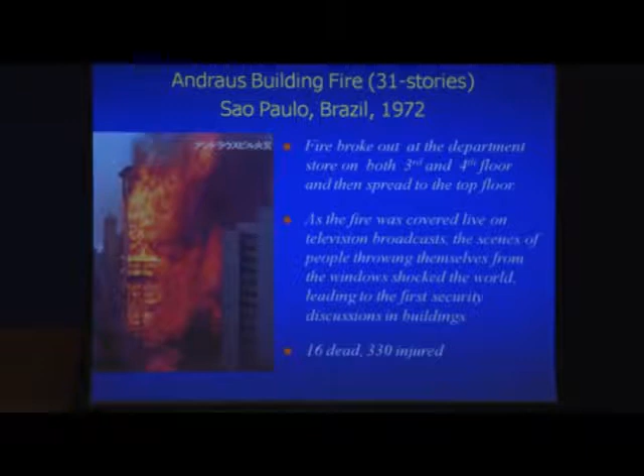I don't need to explain much about this fire because you are Brazilian, you know much more than I know. But it was a very shocking fire to us, and as the fire was covered live on television broadcast, the scenes of people throwing themselves from the windows shocked the world, which led to the first security discussions in buildings.

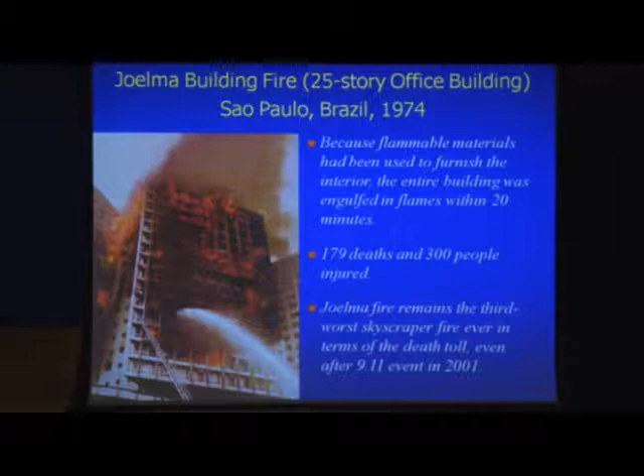Then next year, as you know, the Joelma building fire. It was a much more severe fire, resulting in 179 deaths and 300 people injured. Because flammable materials had been used to furnish the interior, the entire building was engulfed in flames within 20 minutes. The Joelma fire remained the third worst skyscraper fire ever in terms of the death toll, even after the 9/11 event in 2001.

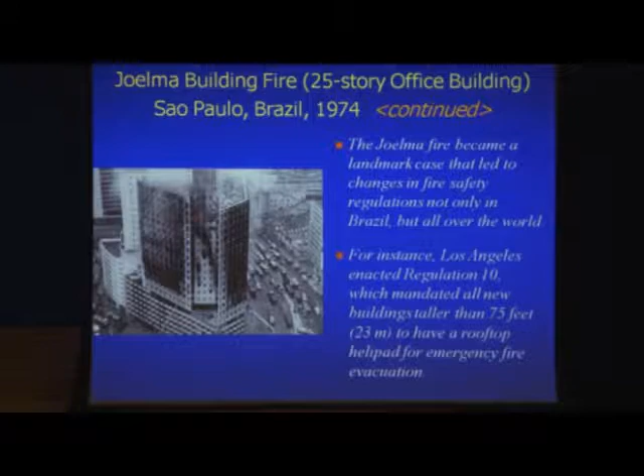The Joelma fire became a landmark case that led to changes in fire safety regulation, not only in Brazil, but all over the world. For instance, Los Angeles enacted Regulation 10, which mandated all new buildings taller than 75 feet to have a rooftop helipad for emergency fire evacuation.

At the same time in Japan, when I was a student in the master course in the university doing fire safety, there was a fire. Also a very deadly fire. 118 people died in the fire in only the 7-story Sennichi department store building. The fire broke out at 22:27 at night in the women's dress sales floor on the 3rd floor under renovation work, due to unspecified cause. And the smoke very quickly spread to the entire building through the vertical shafts of stairs and the elevators. Even though it was night, on the 7th floor there was a nightclub in operation where most of the victims were found. 118 died.

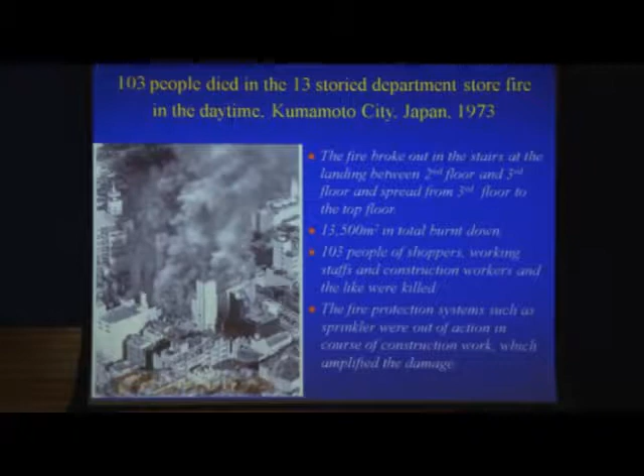In the 1980s, there was another high-rise fire in the U.S., called the First Interstate Bank Building Fire, in 1988 in Los Angeles. As a member of the Japanese government investigation team, I went to the site and entered the building to look at the damage. And we made a report about how the fire spread and how people escaped. Unfortunately, it's written in Japanese.

This fire gave us very good lessons for fire safety in tall buildings. First, I want to show you the video which was made by the Los Angeles City Fire Department.

Sir, I don't know the address. I'm just down the street from it, I'm calling from another building. You're calling from 600 Wilshire? Yes, do you know the intersection or address? It's on Hope and Wilshire Boulevard. Okay, so we're on our way. Good, it's up on the top floor.

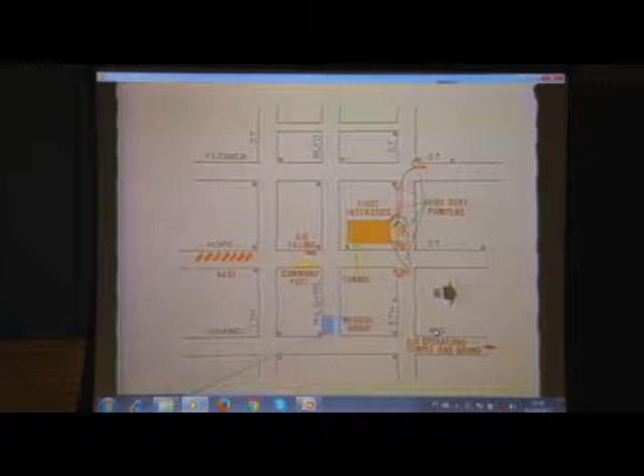On Wilshire was our medical group, set up to treat patients, firefighters and civilians injured in this fire. Moving up towards the fire building, directly north was the fire department inlets used to augment the water system of the building.

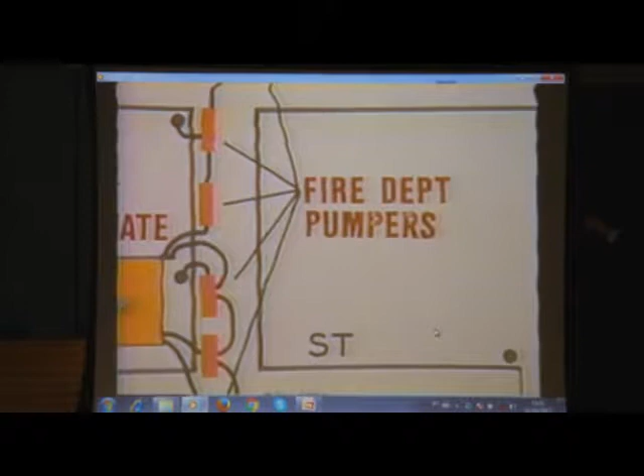We supplied water here through 4 pumps. A number of the hose lines from the pumps were cut by falling glass out of the building and had to be replaced several times during firefighting, as the debris and falling glass damaged several hoses.

Entering from the ground floor was very dangerous, so they decided to enter the building through the tunnel.

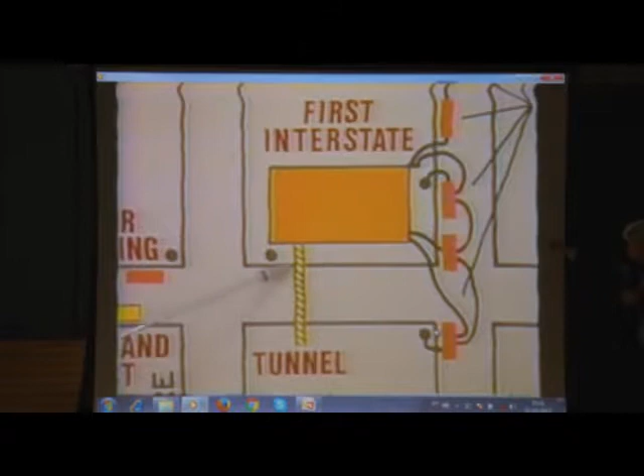The inside is entirely burned down from the 12th floor to the 15th floor. The 16th floor is heavily damaged, and the 17th floor is just a little damaged.

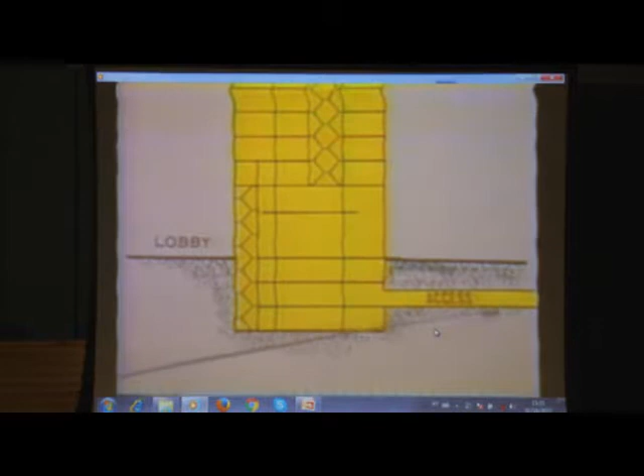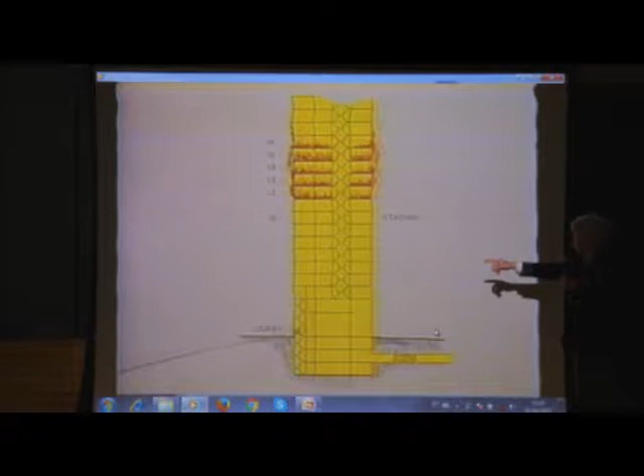Now you can see the hose, water discharge by hose. They entered through the tunnel in the building, and took the stairs, not elevators, up to not the fire floor - they climbed 1 and 2 floors up from the fire floors, so that's the 16th floor and the 17th floor.

Firefighters were deployed on the edge of the building, at the window edge, with a hose. The flame is not from inside, the flame is from outside through the window. They waited for the flame to come and discharged water from the room. That was really successful.

On the 17th floor there was almost no damage. The 16th floor had half damage. The strategy they took was hose lines arranged along the window edge.

Okay, I finished the movie.

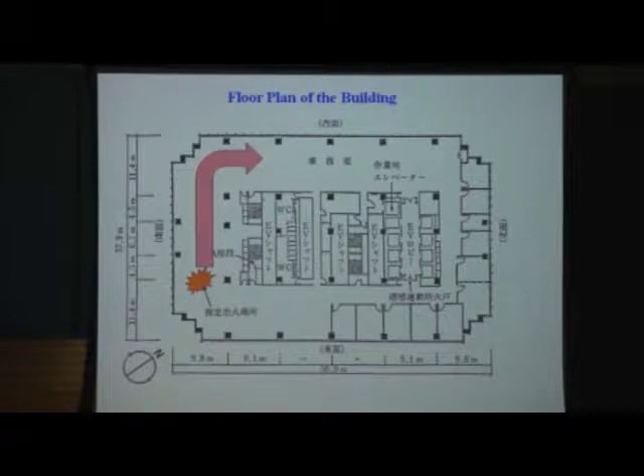On the fire floor, the 12th floor, fire started by some malfunction of a PC, and it is thought the fire cause is from the PC, and this spread out through the floor.

However, the important thing is fire zoning - compartmentation in the center core is very protective. 2 hours fire rating protects the center core, so there was almost no damage inside the center core. That's the most important thing for a high-rise building.

The firefighters don't use, of course there is naturally a firefighters lift, but at that time, before 2008 in the US building code, even though there is a fire lift - I think in Brazil also you have a fire lift - it's not safe from fire. Fire and smoke are the same issue. They can manipulate the fire elevator car from inside, but the only thing they can do is that kind of self-control operation, but it's not safe.

So the firefighters use the stairs inside, very safe stairs, to access 1 or 2 floors above the fire floor. So then they can reach the 16th and 17th floors and wait for the fire to come. That is the main reason they stopped the fire spread.

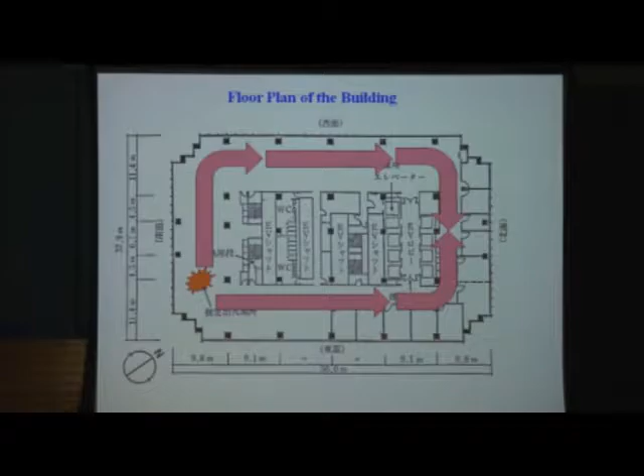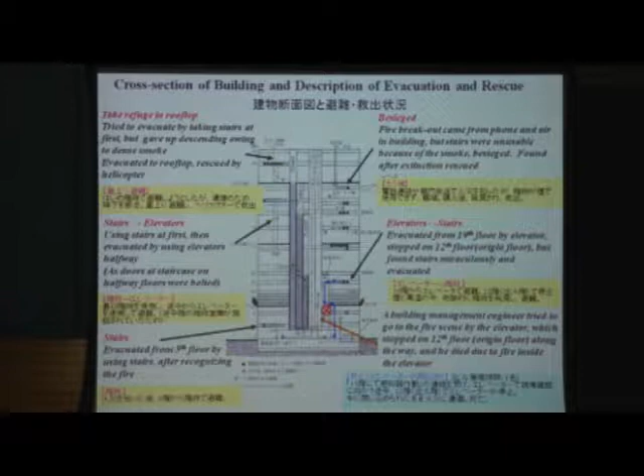I won't go into detail about this. This is the route of evacuation, but it's too much in detail, okay, so I'll skip this slide. If we have time in the discussion, we can explain.

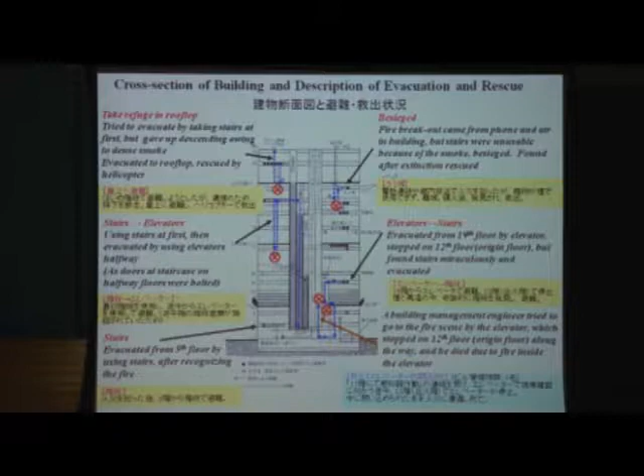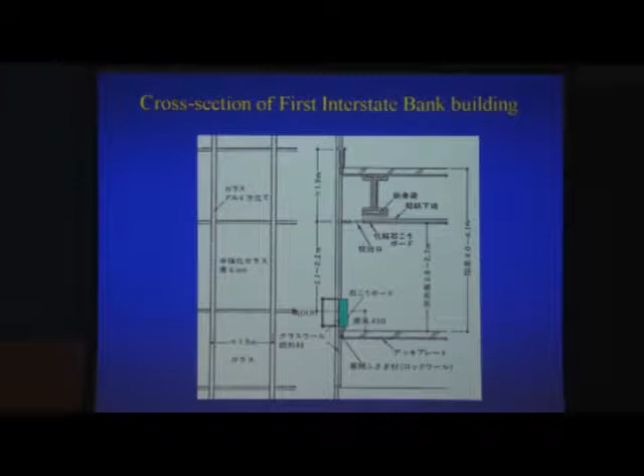One of the reasons for fire spreading from the ejected flame in the exterior wall is that they have a very small size spandrel between the floors, so then the flame easily goes up and ignites the upper floors. This really happened in the First Interstate Bank building.

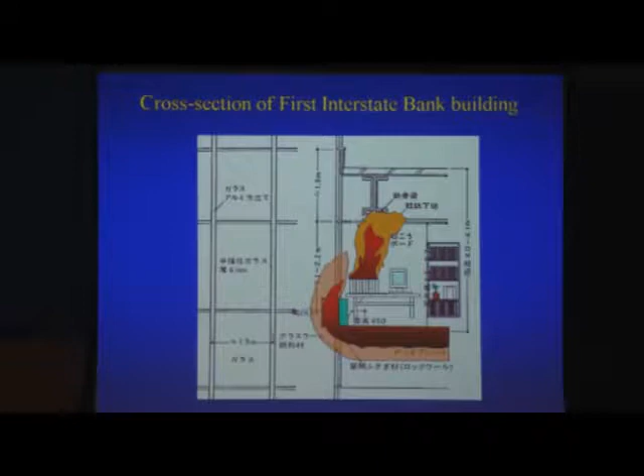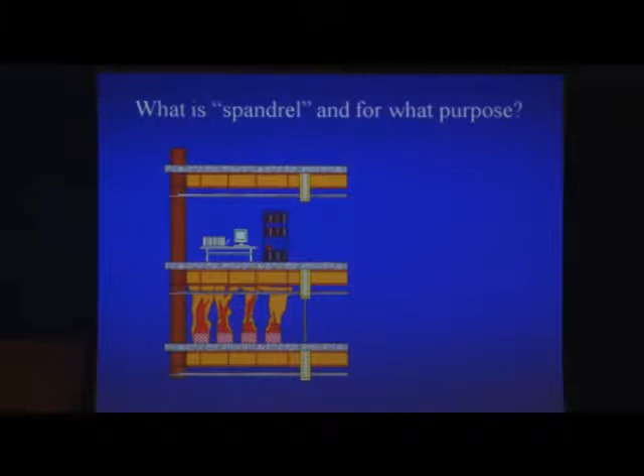What is a spandrel and for what purpose? The left picture shows - I think many high-rise buildings in Brazil have a similar configuration. Some buildings may have a spandrel, but many buildings have no spandrel, only glass between floors. So what happens in that kind of building?

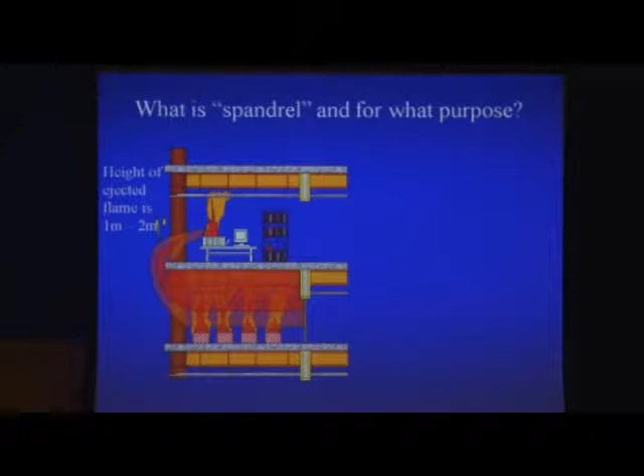Then easily the glass is broken and the ejected flame goes to the inside. But if you have a spandrel like this, fire is blocked from entering the inside. This is the purpose of a spandrel.

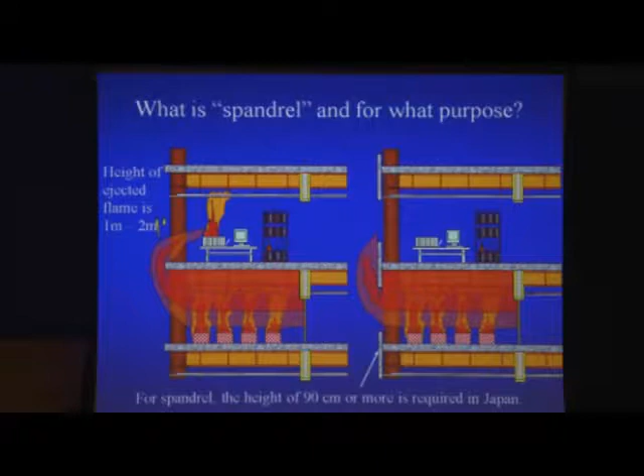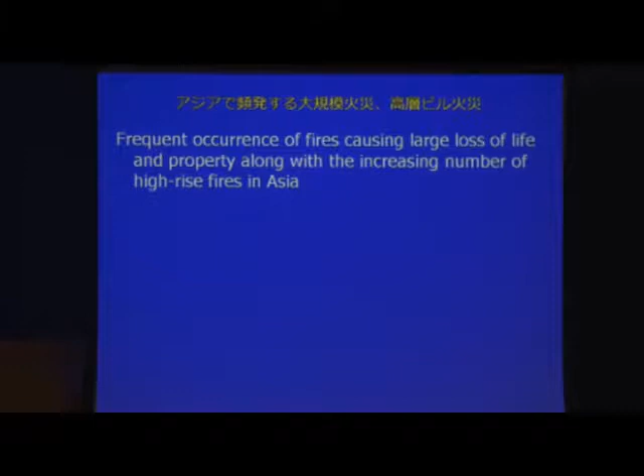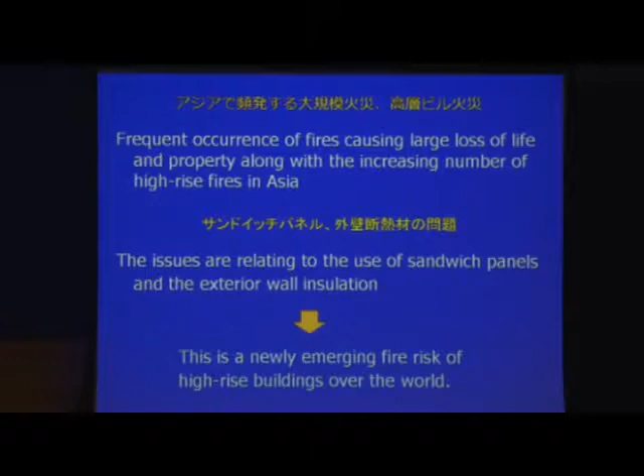Now there is another issue emerging, especially in East Asia and the Middle East - the frequent occurrence of fires causing large loss of life and property, along with the increasing number of high-rise fires in Asia. These issues relate to the use of sandwich panels and exterior wall insulation. This is a newly emerging fire risk of high-rise buildings all over the world now, including the Grenfell apartment fire in London, UK.

In China, 2009, after the Beijing Olympic games, they had a very serious high-rise fire in the China TVCC building. But this news was not released much to the world because the Chinese government wanted to confine this news. But only a Japanese TV station made a news report, so I'll show that one.

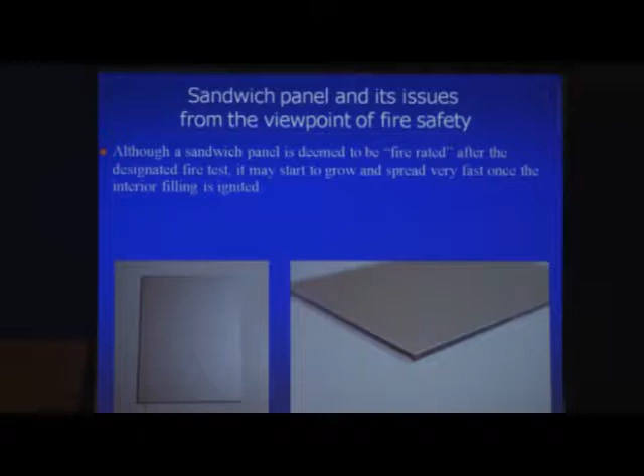So Grenfell Tower—this fire will be discussed by Professor Brian Meacham. So I'll skip this explanation and move to the second part.

My second topic relates to the study of use of elevators in fire evacuation in high-rise buildings. Again, this one.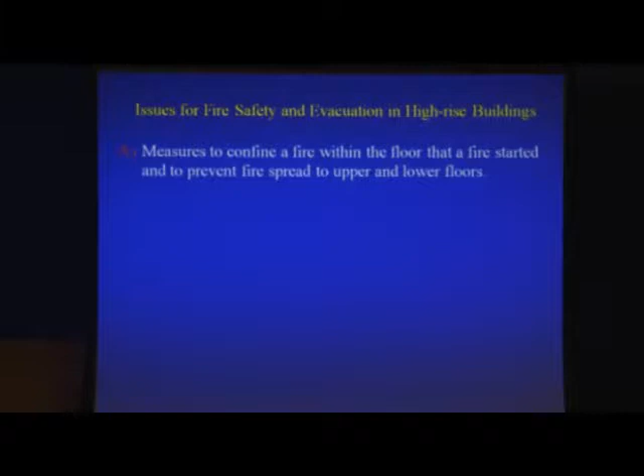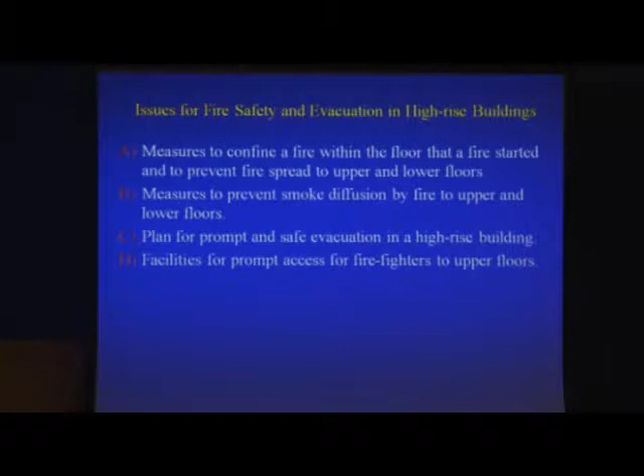First, I'd like to describe the issues of fire protection strategy. A: measures to confine a fire within the floor where it started and prevent fire spread to upper and lower floors. Second: measures to prevent smoke diffusion by fire to upper and lower floors. Third: plan for prompt and safe evacuation in a high-rise building. Fourth: facilities for prompt access for firefighters to upper floors.

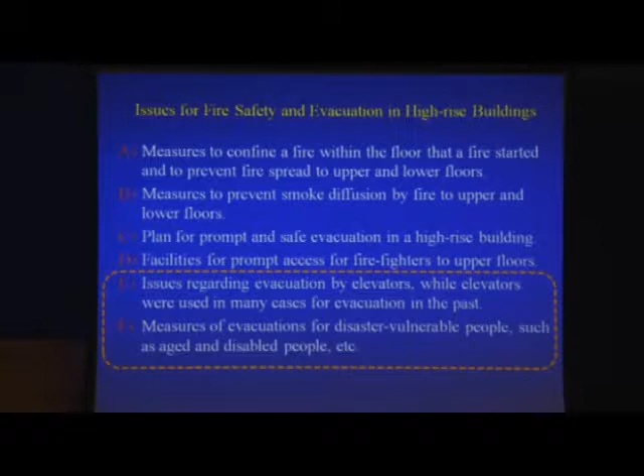Fifth, issues regarding evacuation by elevators—elevators were used in many cases for evacuation in the past. Sixth, measures of evacuation for disaster-vulnerable people such as aged and disabled people. I will talk about the issues of the last two items.

In many past fires in high-rise buildings, not a few people used elevators for evacuation. The population of aged people has been rapidly increasing, and accessibility for disabled people has improved. So many disabled people and wheelchair users are now on upper floors, especially in public buildings like cinema buildings.

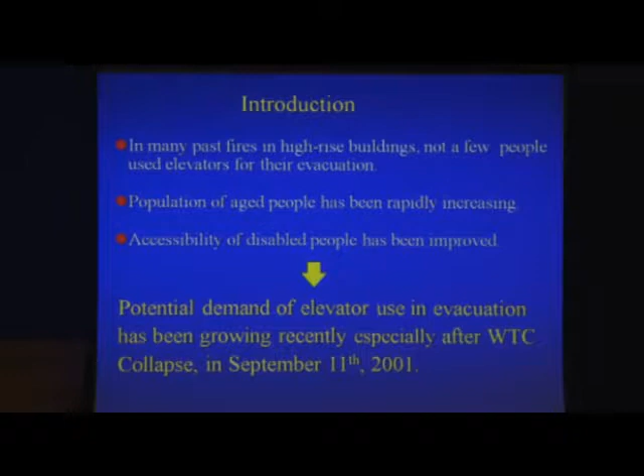Potential demand for elevator use in evacuation has been growing recently, especially after the World Trade Center collapse on September 11th.

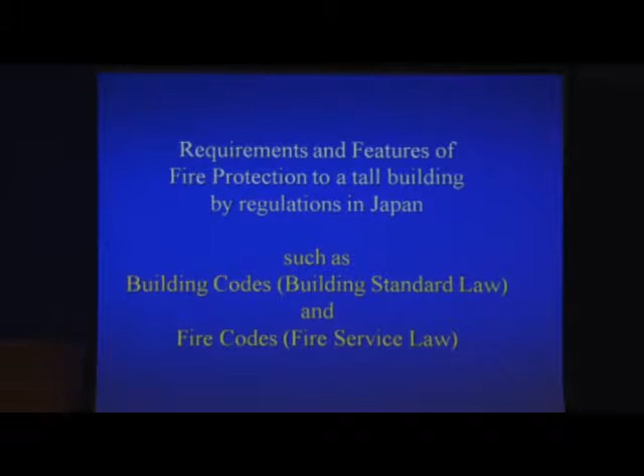Requirements and features of fire protection to a tall building by regulation in Japan, such as building codes and fire codes. Requirements and features of special egress stairs in Japan: all stairs connecting to the 15th floor and higher are required to be special egress stairs.

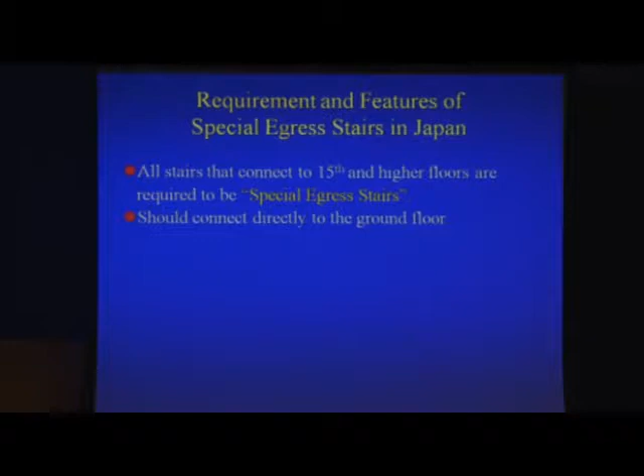It should connect directly to the ground floor, be compartmentalized with fire-rated walls, and be attached with a vestibule with smoke control system in front of the entrance door of the stairs. Mainly used for evacuation of occupants, but after evacuation is completed, it may be used by fire brigades.

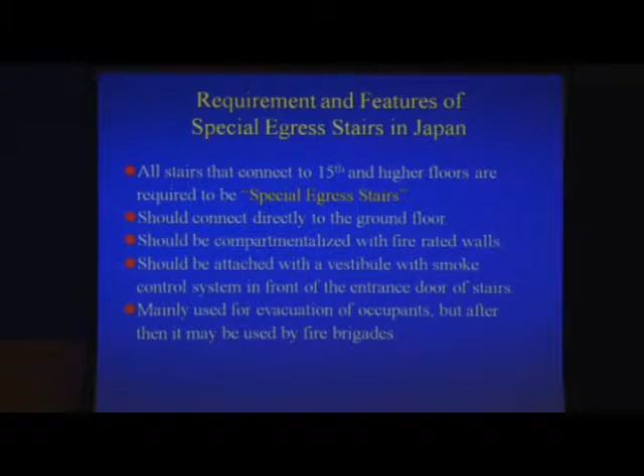Supported by emergency generators, Japanese firefighters can use elevators in high-rise buildings even from the 1970s. But in the US, they changed the building code so high-rise buildings should have a real fire lift in the building—the IBC building code from 2008.

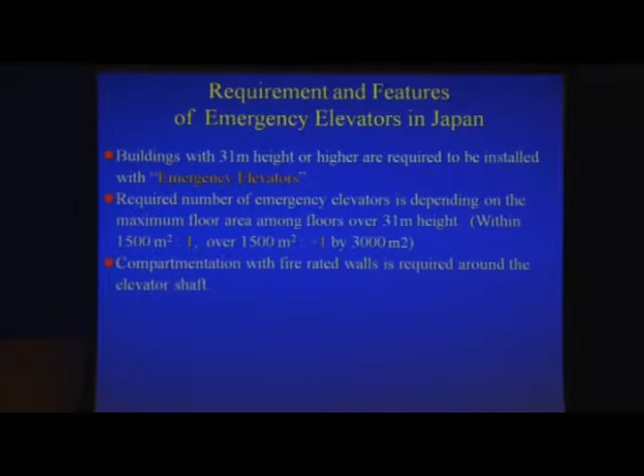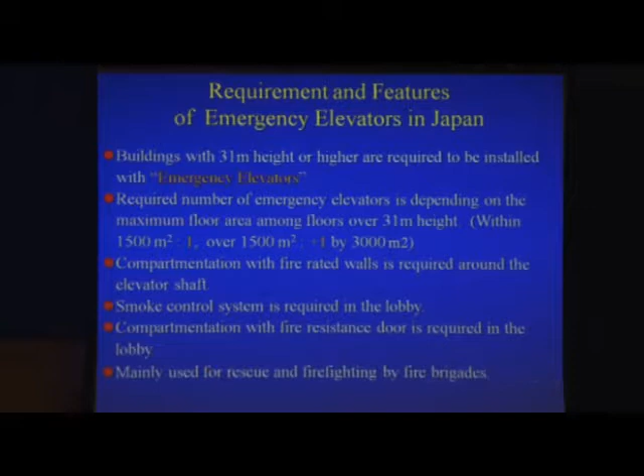Compartmentation with fire-rated wall is required along the elevator shaft. Smoke control system is required in the lobby. Compartmentation with fire-resistant door is required in the lobby, and it is mainly used for rescue and firefighting by fire brigades. But now the discussion has started for allowing disabled people to use this firefighter's lift before firefighters' action.

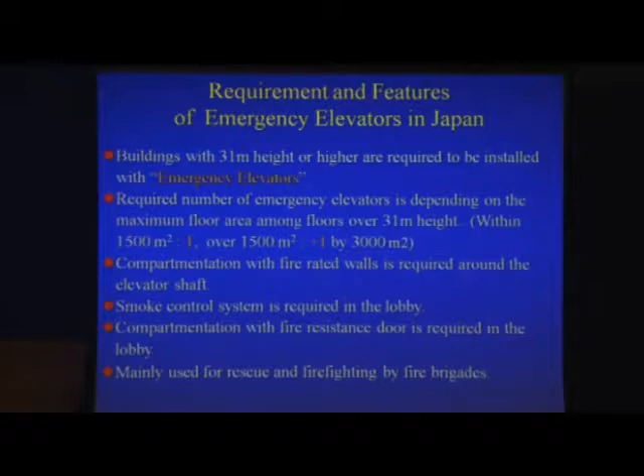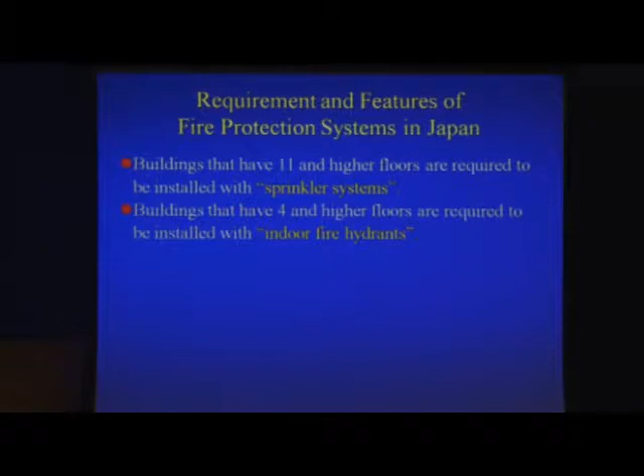And then, requirements and features of fire protection systems in Japan, which are required by the Fire Service Law. Buildings that have 11 and higher floors are required to be installed with a sprinkler system. Buildings that have 4 and higher floors are required to be installed with indoor fire hydrants. Buildings that have 5 and higher floors together with 6,000 square meters in total floor area are required to be installed with standpipe risers.

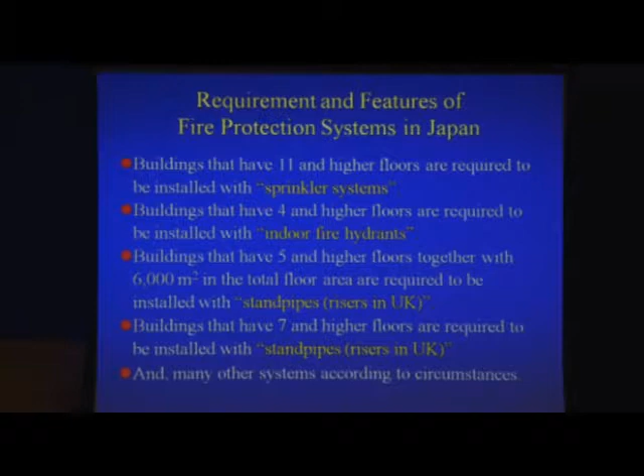Buildings that have 7 and higher floors are required to be installed with, this is the same thing, sorry. Regardless of the size of the building, regardless of the floor area, and many other systems according to the circumstances.

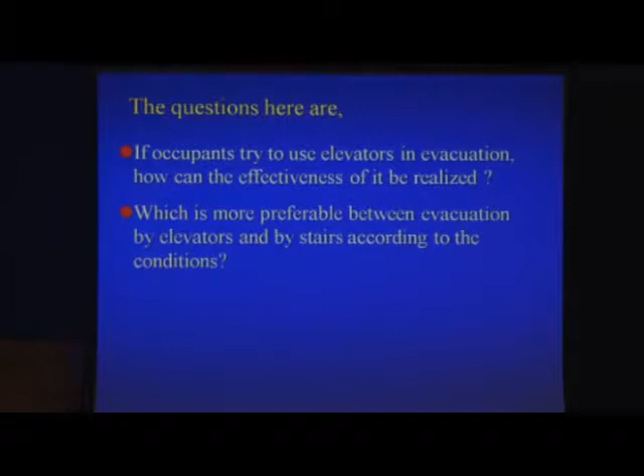Then the questions in this topic are: if occupants try to use elevators in evacuation, how can the effectiveness of it be realized? Which is more preferable between evacuation by elevators and by stairs, according to the condition? We developed a simplified model to evaluate evacuation time by elevators, a feasibility study to examine the issues of elevator use in evacuation.

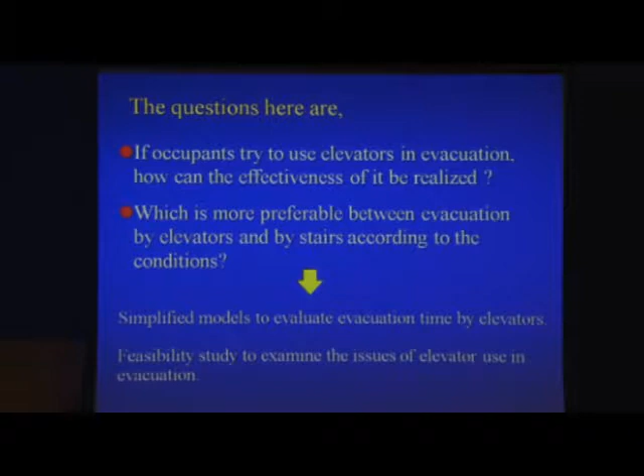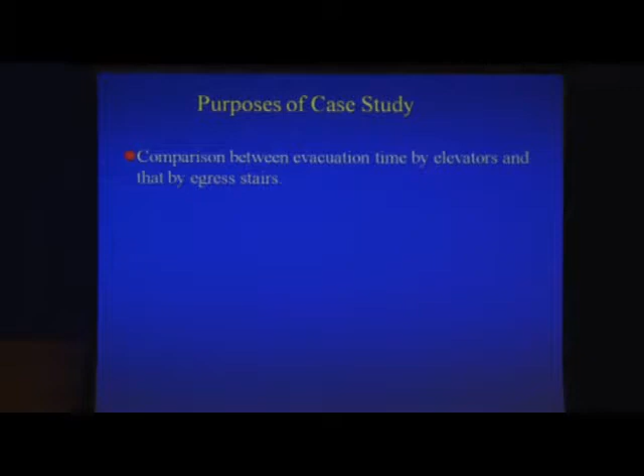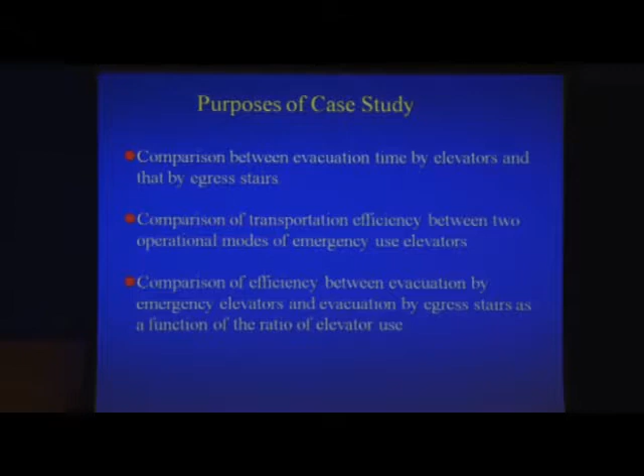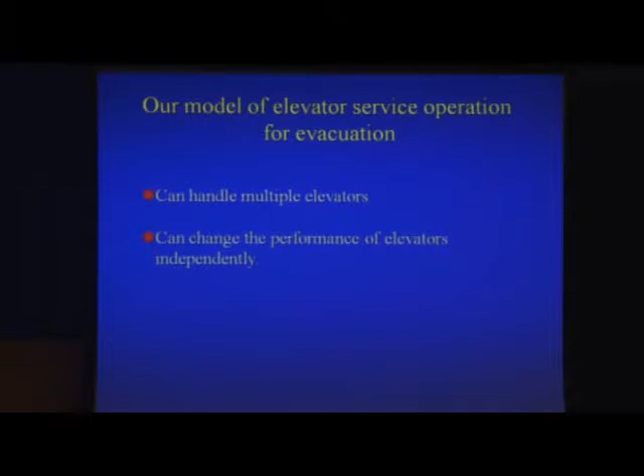The purpose of the case study is the comparison between the evacuation time by elevators and by egress stairs. Comparison of transportation efficiency between two operational modes of emergency use elevators. The third is comparison of efficiency between evacuation by emergency elevators and evacuation by egress stairs as a function of the ratio of elevator use. Our model of elevator service operation for evacuation can handle multiple elevators and can change the performance of elevators independently: speed, capacity, and priority of stop floors.

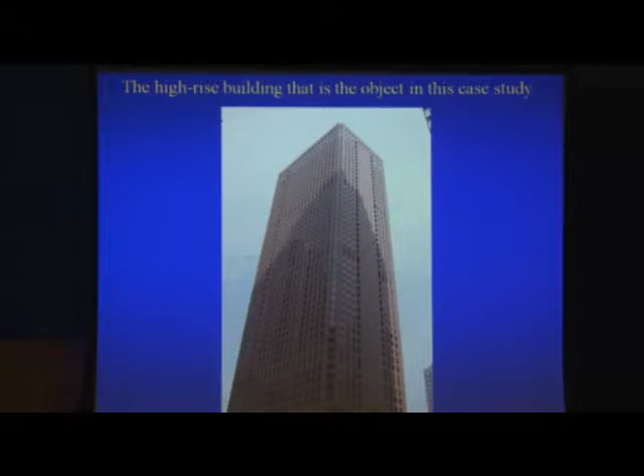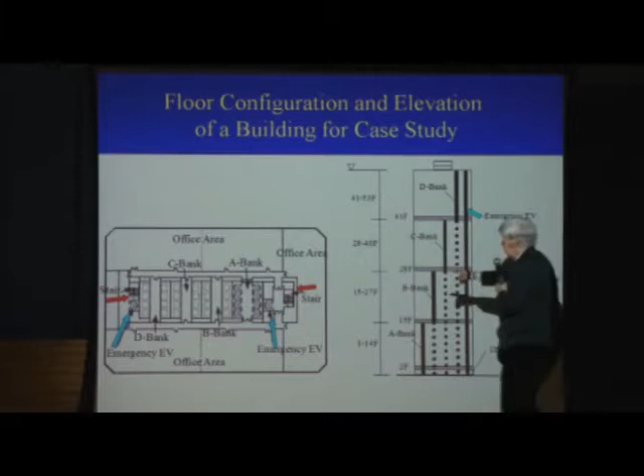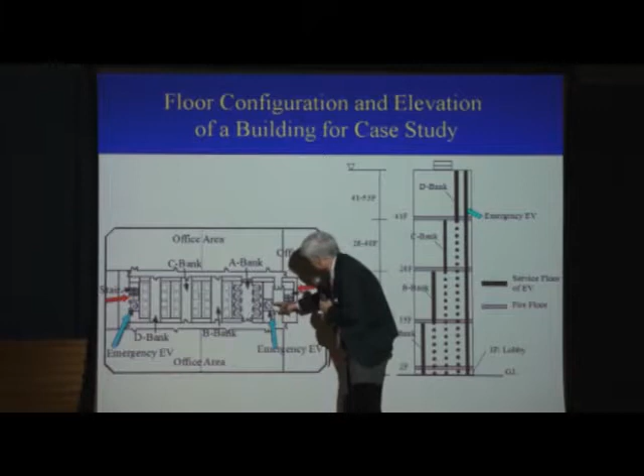emergency elevators. But, yes, these are the usual common elevators. This is for firefighters, but it's usually open. This is usually closed. And these are usual elevators.

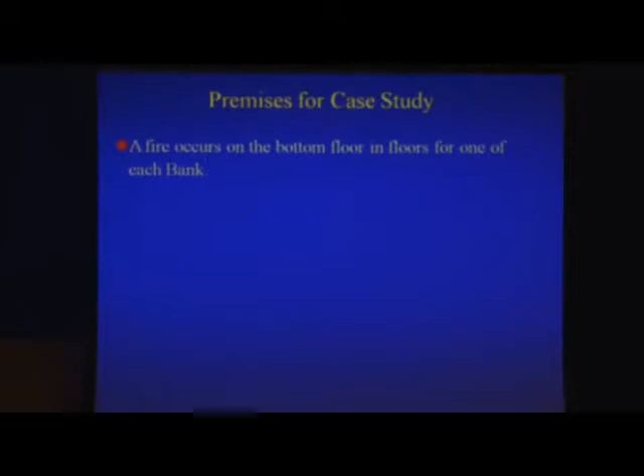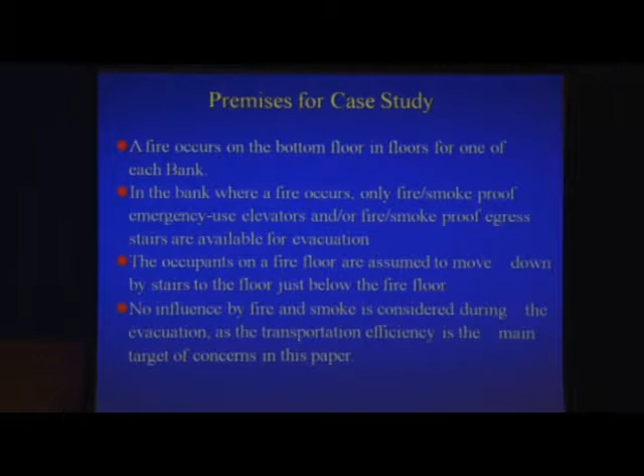Premises for case studies. A fire occurs on the bottom floor for one of each bank. In the bank where a fire occurs, only a fire- and smoke-proof emergency use elevator and/or fire- and smoke-proof egress stairs are available for evacuation. We don't use common elevators in this case study. The occupants on the fire floor are assumed to move down by stairs to the floor just below the fire floor. No influence of fire and smoke is considered during the evacuation, as transportation efficiency is the main target of concern in this case study.

I skip this. And the floor configuration of the elevator, I already told. So, in the case study, I compare evacuation by these emergency elevators and the emergency egress stairs from these floors, 41st floor to 53rd. We neglect other floors because we simply compare the occupants in the dangerous zone. The fire floor is the 41st floor, so the occupants above the fire floor should leave fast.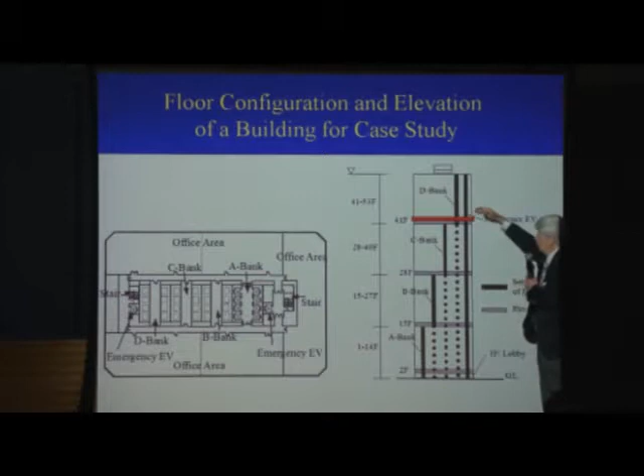This is the result. So you can see, we need an explanation. This bank is the case for the case study. If you use the emergency elevators, there are two elevators on each floor. If we use the two emergency elevators, it will take 6,000 seconds for total evacuation. But if we use the egress stairs, it can be, no.

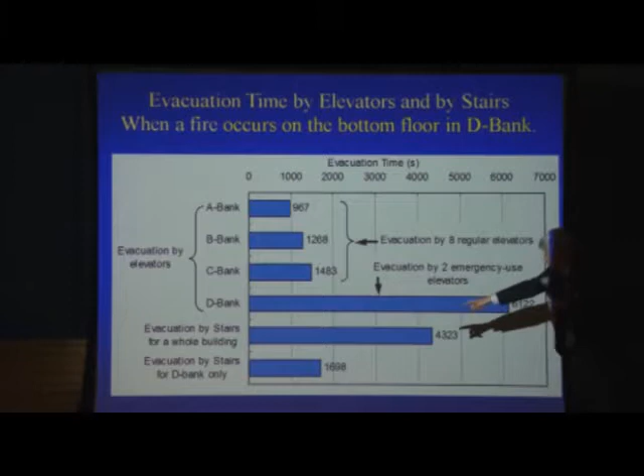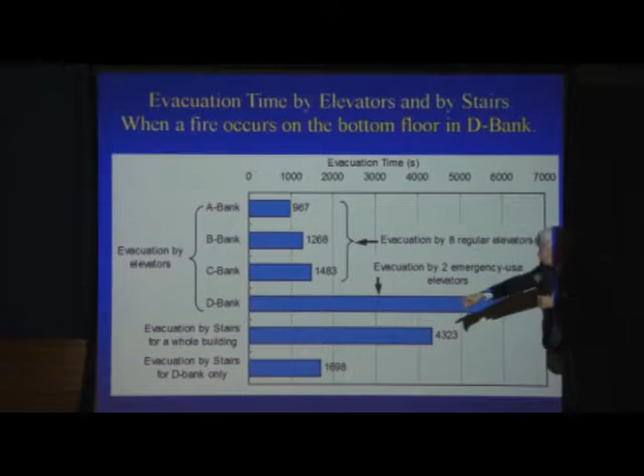The bottom one, evacuation by stairs for this bank. If we use the two special egress stairs, 6,000 is reduced to 1,700 seconds, almost one quarter. And even if all occupants in the whole building use the evacuation stairs, it takes about 4,000 seconds, even shorter than the case where only people on the upper floors, 41 to 53, use the emergency elevators.

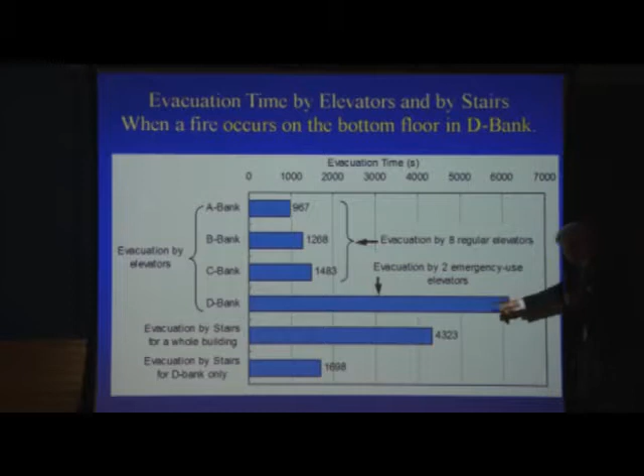All occupants, if they take the egress stairs, it's much shorter than this one. So many people think the elevator is faster than going down through the stairs. And many people believe walking down 50 stories is very hard. But if you try at least once, taking the stairs from 50 stories to the ground floor, it's not so tough. If you walk up by stairs, it's very tough, of course. Your heart is beating very quickly, but going down is very close to going horizontally.

You should try once. I really did it in some training, an evacuation drill in a high-rise building. At that time, I had some damage in my heart. So I tried to join a group of young people and just follow this group at the natural speed downward through the stairs. I had no problem catching up with them.

So the question is, which is faster to use, elevators or stairs? The elevator is, of course, faster than walking down, but the capacity of the car at one time is very limited. Only 15 people are allowed to get in. And sometimes there is conflict between the inside and outside at every stop floor. It takes a much longer time. So the waiting time is most crucial in elevator use. So if you use the stairs, it's much easier and faster. That's my comment from this study.

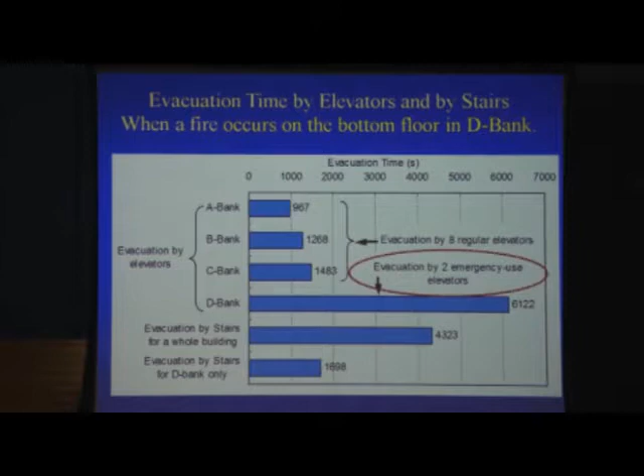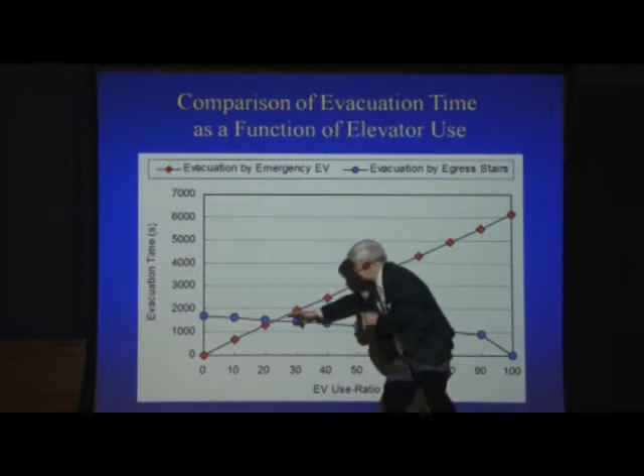So I really recommend, in the end, only disabled people, aged people, pregnant ladies and some small kids must be prioritized to use emergency elevators, not common people. Common, able-bodied people must use the exit stairs. For these vulnerable populations, if common people want to use emergency elevators as much as the vulnerable people, there might be chaos and conflict among the people.

So able-bodied people and common usual-bodied people should use the egress stairs, and some designated people who are vulnerable in walking down must be prioritized to use the emergency elevators.

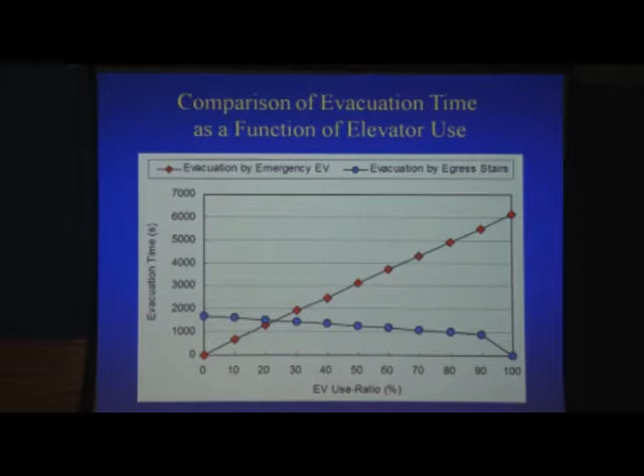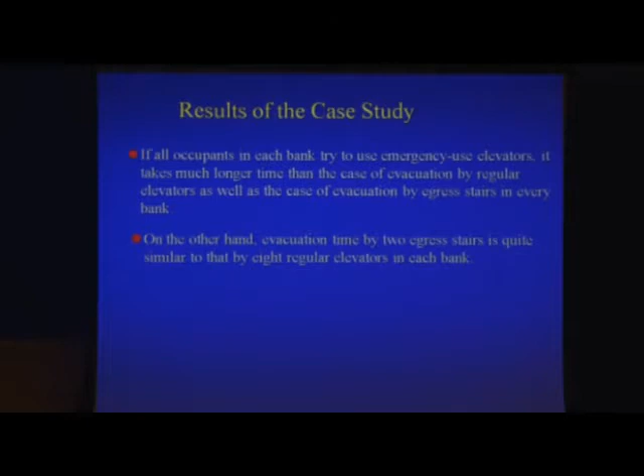That's my concluding remarks. So again, if all occupants in each bank try to use emergency elevators, it takes a much longer time than the case of evacuation by regular elevators, as well as the case of evacuation by egress stairs. On the other hand, evacuation time by 2 egress stairs is quite similar to that by 8 regular elevators in each bank, if they can be used.

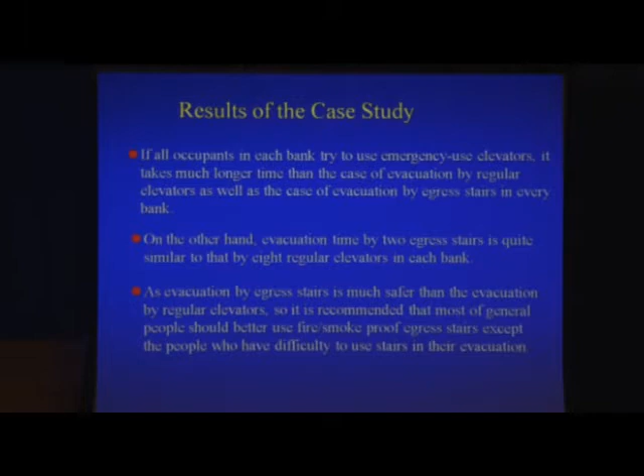As evacuation by egress stairs is much safer than evacuation by regular elevators, it is recommended that most general people should better use fire and smoke-proof egress stairs, except the people who have difficulty using the stairs in their evacuation. The evacuation completion time by emergency use elevators increases at a great rate in proportion to the elevator use ratio among the occupants.

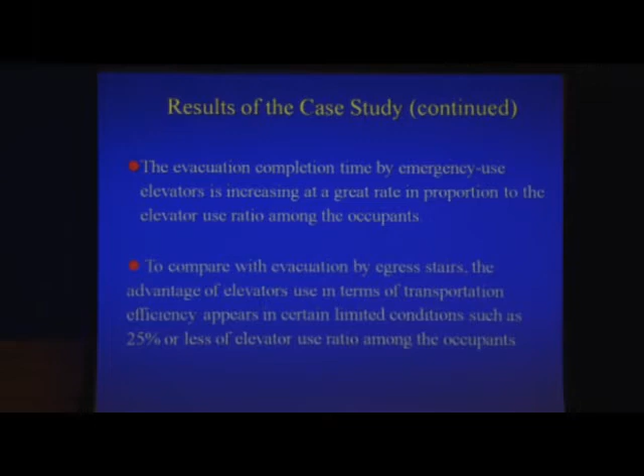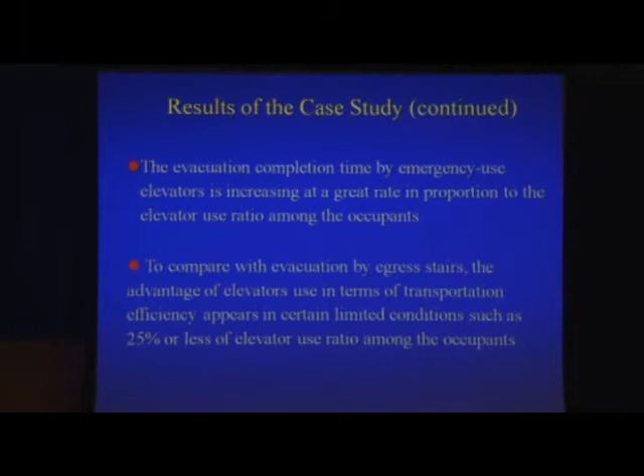Compared with evacuation by egress stairs, the advantage of elevator use in terms of transportation efficiency appears in certain limited conditions such as 25, I think it's much smaller, 20% or less elevator use ratio among the occupants. If the elevator use group can be designated only for a small part of occupants, such as disabled people, it will be effective to use elevators in evacuation for those people.

However, for other general people, it would be better to use stairs for their evacuation in most cases, as well as to make evacuation of disabled people by elevator more effective. This is the most important. But in some symposiums relating to human behavior in fire, the majority of researchers' opinion is that evacuation elevators must be used for high-rise buildings.

But even with evacuation elevators, there's no priority among the people, because we cannot control people's decision to use the elevators. That's a continuing discussion on this topic.

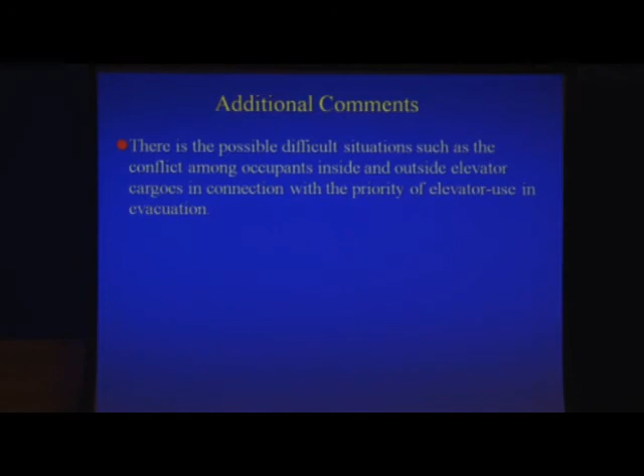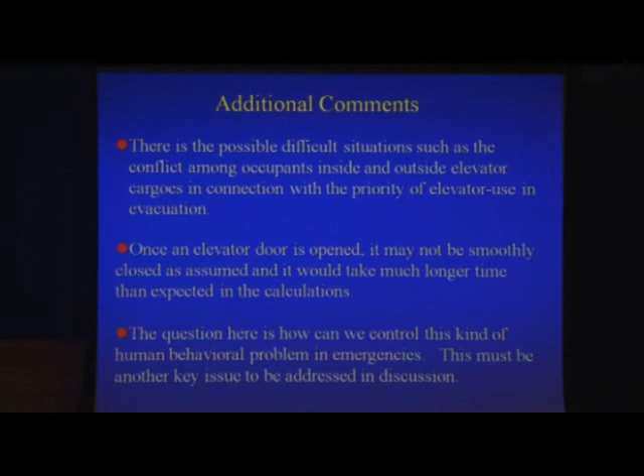Additional comments: there are possible difficult situations such as conflict among the occupants inside and outside elevators in conjunction with the priority of elevator use in evacuation. Once an elevator door is opened, it may not close as smoothly as assumed, and it would take a much longer time than expected in the calculations. The question here is how can we control this kind of human behavioral problem in emergencies? This must be another key issue to be addressed in discussion.